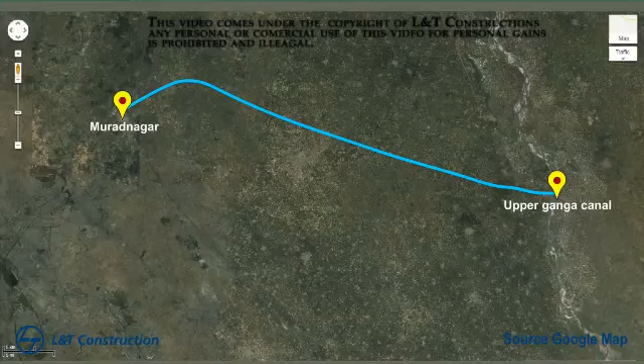Delhi Jal Board, a department of National Capital Territory of Delhi, is responsible for entire Delhi's water supply and sewerage system. Bhagirathi is one such water treatment plant, designed and commissioned in the year 1983. The primary source of raw water is from Upper Ganga Canal through the intake at Muradnagar. The raw water flows through 2800 mm diameter gravity main to the Bhagirathi water treatment plant from Muradnagar.

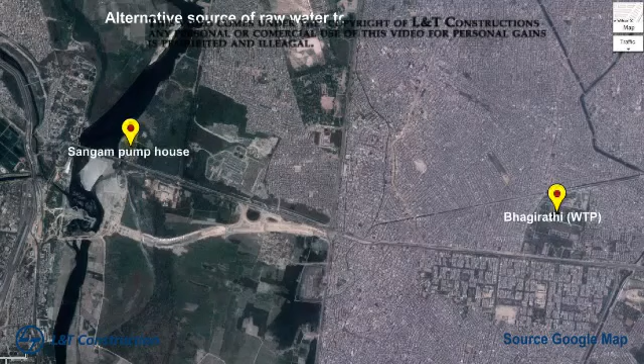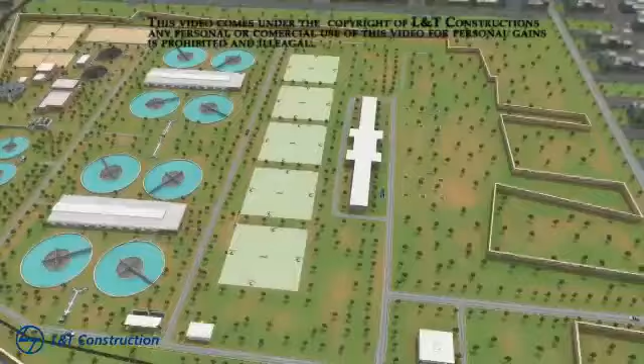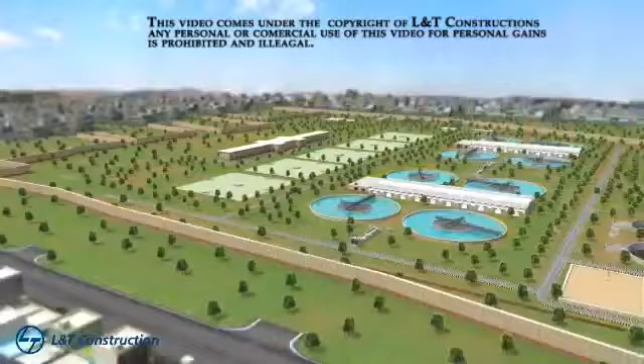Alternative source of raw water to the Bhagirathi water treatment plant is river Yamuna by pumping from raw water pump house at Sangam, Wazirabad. Bhagirathi water treatment plant works on the proven conventional treatment technologies to provide quality potable water 24/7 to entire East Delhi, covering more than 40 lakh population. The water treatment plant consists of one bifurcation chamber, 8+2 clariflocculators and 40+4 rapid sand filters and other utilities for disinfection, chemical addition and storage.

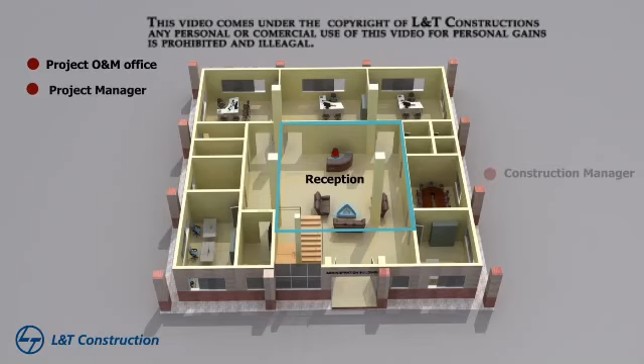Administration building. Rehabilitation would strengthen the building and give new look interior as well as exterior. At ground floor, there would be contractors project, operation and maintenance office, reception, place for project manager, construction manager, plant manager, planning cell, execution and administration staff with pantry arrangement. First floor would be for Delhi Jal Board officials and conference hall, suitable to accommodate 30 participants.

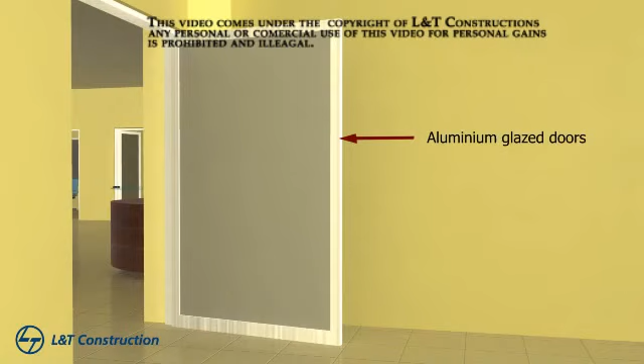The building would have vitrified tile flooring, aluminium glazed doors and windows, interior wall finished by oil-bound distemper and exterior finish by Dholpur and Agra stone cladding. Also, roof waterproofing by APP membrane done over screed concreting. The building would promote green building concept. Process. Intake work at Muradnagar.

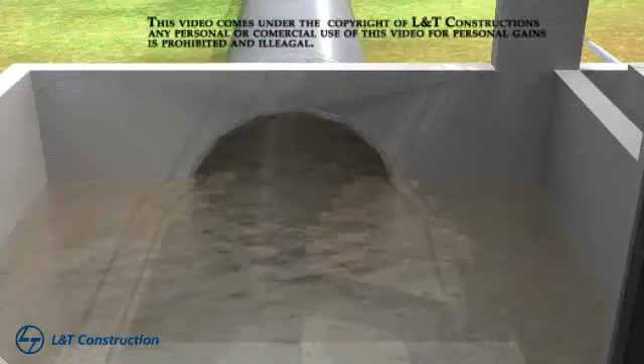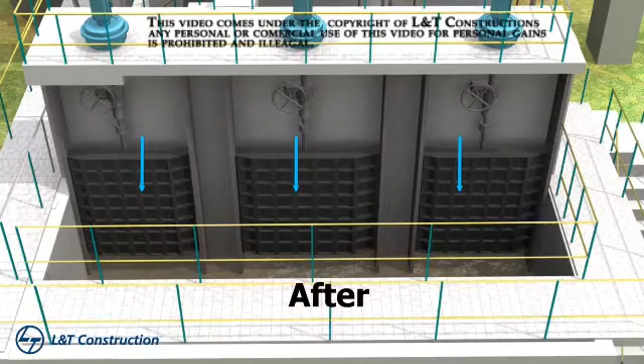Bifurcation chamber. Raw water comes from Upper Ganga Canal, flows through 2800 mm diameter gravity main to the newly constructed bifurcation chamber, which includes one electrically operated sluice gate of size 3000 by 3000, which shall have control over full flow, 6 electrically operated sluice gates before and after bar screens, 3 numbers PLC-based operated SS bar screens which remove floating materials, 4 motorized operated delivery valves to supply water to 8 clarifiers of 100 mgd and 1 motorized operated delivery valve to supply water to 10 mgd water treatment plant.

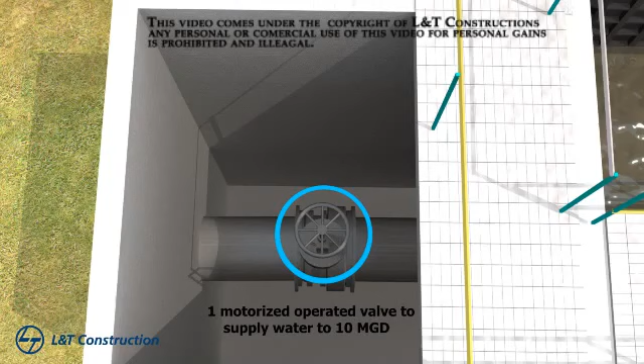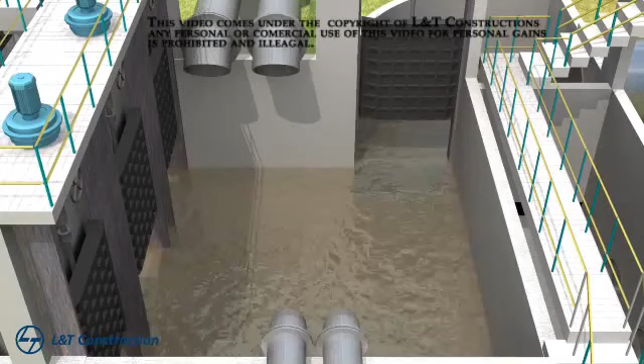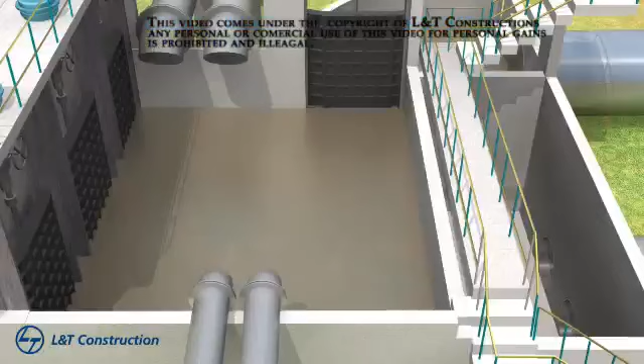An overflow arrangement is also provided to handle excess flow or to bypass entire flow during power outage or other emergencies. When Upper Ganga Canal is closed for maintenance, raw water from Sangam raw water pump house is supplied through 2 1500 mm pumping mains to the bifurcation chamber. 24 hours automatic monitoring of water quality and quantity of incoming raw water. If the set desired parameters of raw water vary and fall below the acceptable limits, there will be a warning alarm. If the same situation continues, the PLC system will automatically deliver command of stopping of raw water.

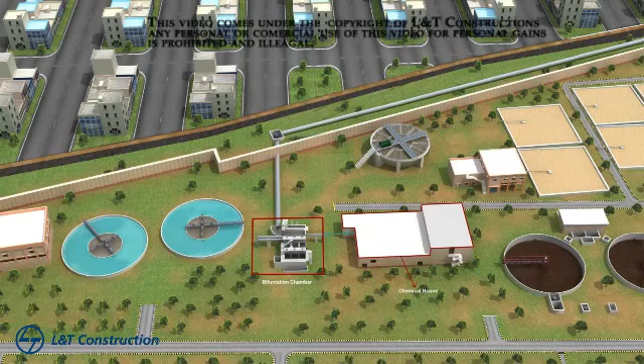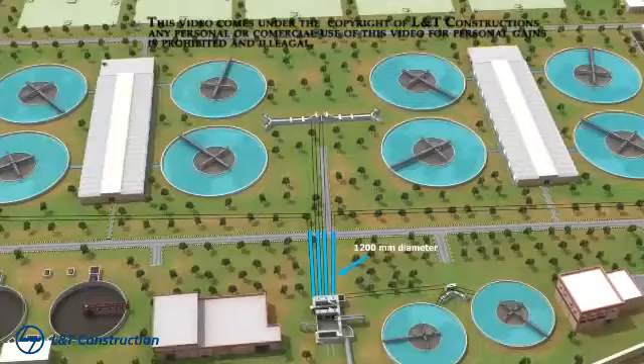Pre-chlorination system installed in new chemical house is responsible to dose chlorine in bifurcation chamber water as a disinfectant and prevent algae growth on water contact surfaces. Clarifier. From bifurcation chamber, water flows through 4 1200 mm diameter pipes towards respective inlet chambers. One additional 800 mm diameter pipe is also provided to supply raw water to 10 mgd water treatment plant. From each inlet chamber, water flows via 2 different motorized operated penstock gates through 2 divisional channels to flash mixers. The division channels have measuring flume to measure flow. Coagulants, alum and PAC, which come from chemical house by pumping line, dose into the respective channel.

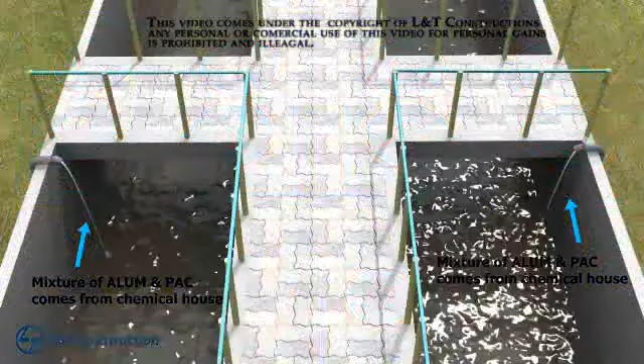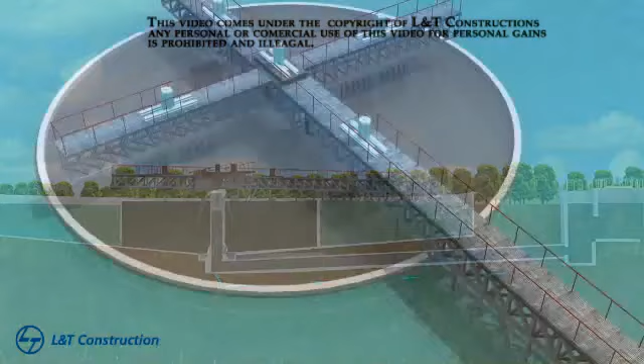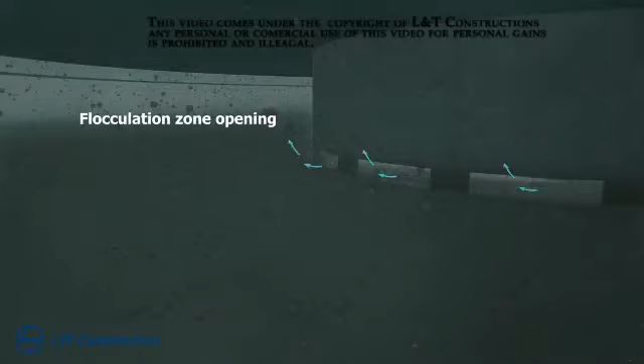Flash mixers consist of VFD-based electrically operated agitator to mix coagulants, alum and PAC properly in raw water. From flash mixer, water goes to clariflocculator feed chamber. From each dedicated clariflocculator feed chamber, water flows through 1000 dia CI pipe to clariflocculator. Total 8 numbers clariflocculators are available in the main stream of 100 mgd. In each clariflocculator, water enters through openings provided in central shaft. Water fills into the flocculation zone first, where slow mixing is done and flock formation takes place. Flocculation zone has openings at the bottom to direct the water into the settling zone, where settlement of flocks takes place. The settled sludge is scraped out by mechanical scraper from settling zone.

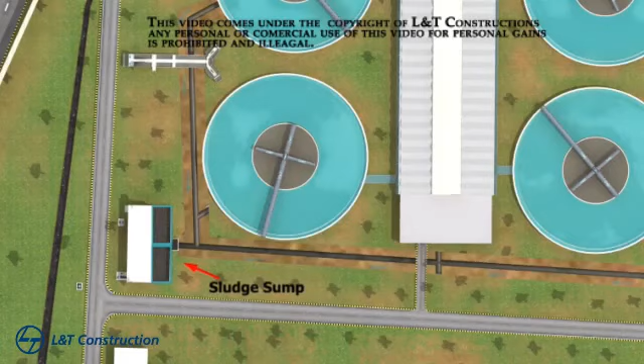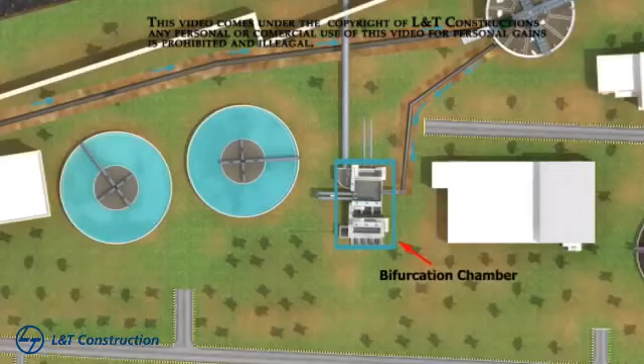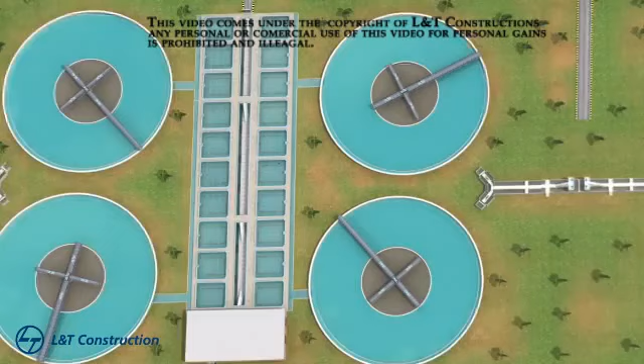The sludge from clariflocculator is collected into the sludge sump through sludge pipeline. The same sludge is pumped to the reactor thickener of recycle plant. From reactor thickener, the supernatant is recycled to bifurcation chamber, which minimizes water losses. The clear water from clariflocculators is collected into the peripheral launders. The collected clear water enters into the filter house via filter feed water channels. At the outlet of clarifier and prior to peripheral launders, water passes through independent gate, useful during isolation of clarifier for maintenance.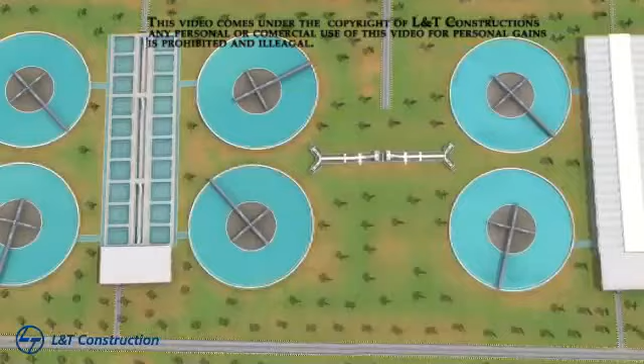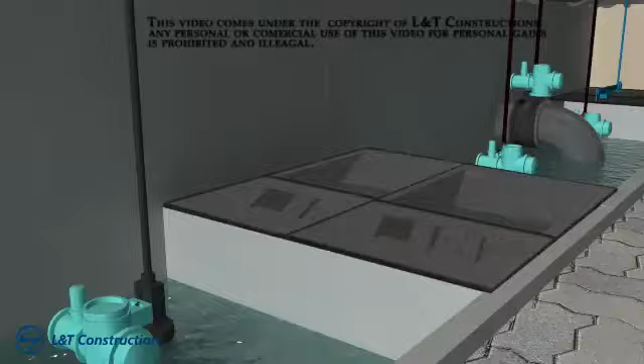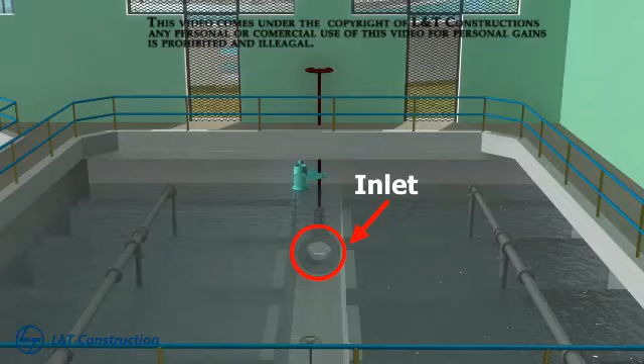Filter house. There are 2 filter houses in the main stream. Each would be with micro PLC based 20 rapid sand filters in 2 rows. Water passes through these filter beds for further treatment to achieve desired quality of water. Below the filter media, a grid of laterals collect pure water and transmit it to manifold channels, then further to filter control boxes, where flow control valves regulate the flow to maintain constant rate. From filter control box chambers, the filtered water flows to the underground reservoir through clear water channels. Chlorine is dosed at the clear water channels, east and west, to achieve complete disinfection before storing the water into the underground reservoirs.

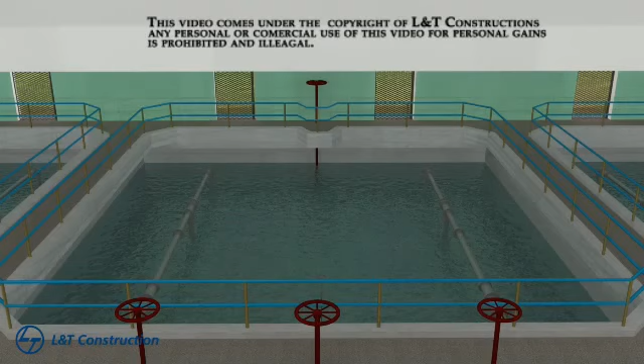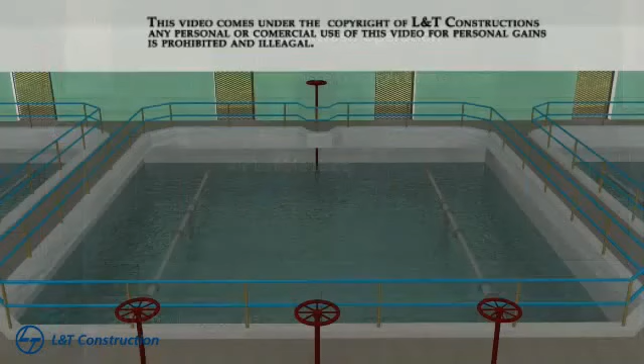Under drain system with new motorized operated inlet, outlet, backwash inlet, backwash outlet valves. The feature of micro PLC based filter bed is continuous automatic monitoring the healthiness of filter bed and also ensuring the execution of backwash operation without any manual interference. Loss of head and rate of flow. The backwash of filter bed is programmed in such a way that if loss of head is more than the set parameter, the system goes for backwash process. Also, in case of high turbidity in outlet of filter bed, the micro PLC system would automatically shut down the concerned filter bed and also send the information and alarm to main control room for necessary action.

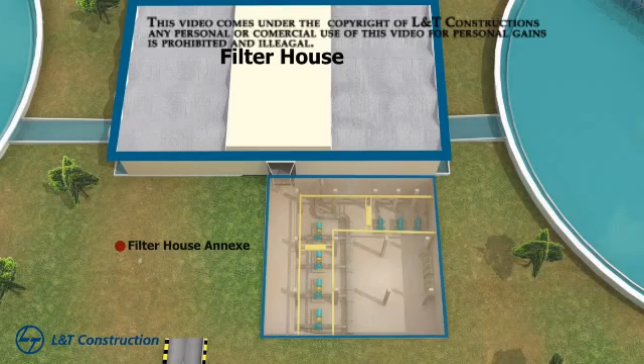Filter house annex. Each filter house is equipped with a PLC-based filter house annex for backwash water and air supply. The PLC of the filter house annex would monitor the performance of the micro PLC provided by each bed and also supply the water and air on requirement and request of the micro PLC for backwashing purposes automatically. There would be provision of automatic dewatering pumps for dewatering the excess water.

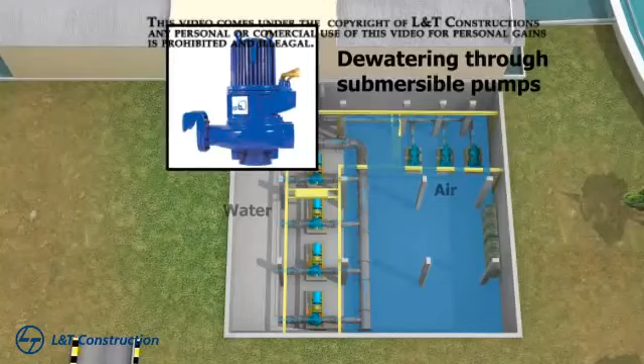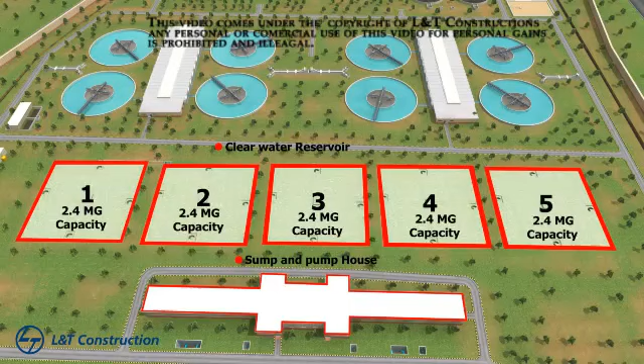Clear water reservoir. The disinfected clear water comes from the filter houses, 2 of 100 mgd and 1 of 10 mgd, and is stored in 5 numbers clear water reservoirs through the clear water channel. Each clear water reservoir would have motor-operated inlet and outlet gates for individual isolation of the clear water reservoir.

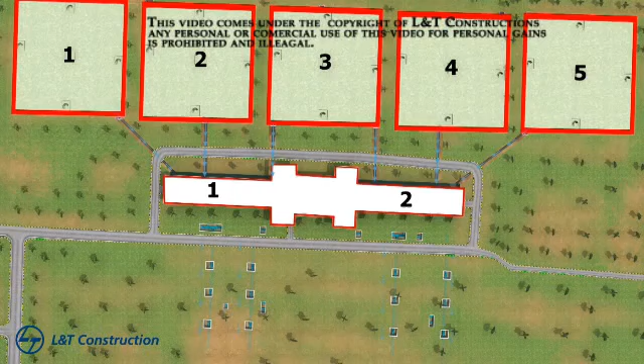Clear water sump and pump house. Clear water from 5 numbers reservoirs is distributed to 2 numbers clear water sumps. CWR number 1, 2, 3 are connected to CWS number 01 and CWR number 3, 4, 5 are connected to CWS number 02 for pumping to 4 numbers rising mains.

In any condition, if the water level is minimum, the system would give an alarm. If no precaution is taken, it would automatically stop the pump as per the program, hence preventing dry run. And in case of rise above maximum water level, the system would also give an alarm.

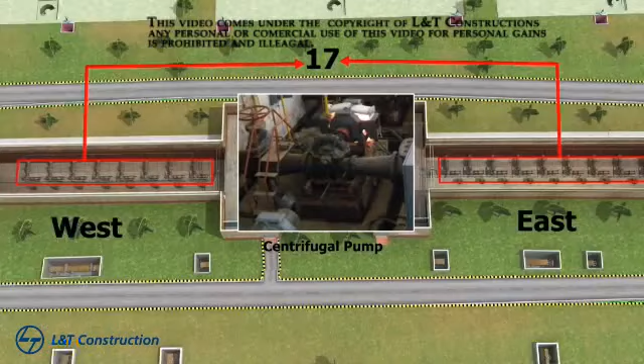There are 17 existing centrifugal pumps in the clear water pump house, where serial number 1 to 7 are of 12.5 mgd capacity for 45 meter head and serial number 8 and 9 are 7.5 mgd capacity with 45 meter head. Pumps from serial number 1 to 9 are on the east side of the pump house and serial number 10 to 17 are 12.5 mgd capacity for 45 meter head on the west side of the pump house.

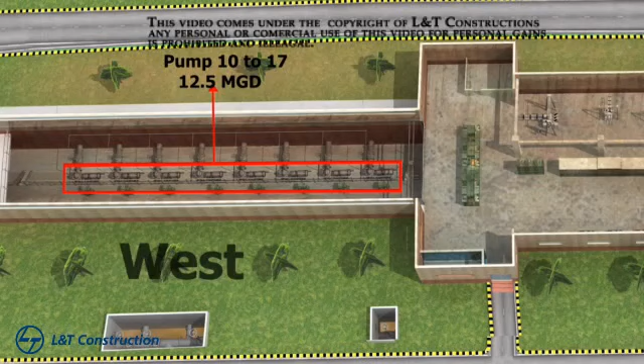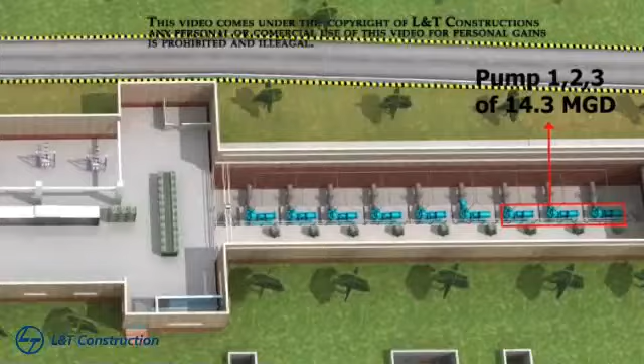The new installations of pumps are as per the same division of existing arrangements, where pump number 1 to 9 are on the east side and pump number 10 to 17 are on the west side of the pump house. New pumps number 1, 2, 3 are pumps of capacity 14.3 mgd, 20 meter head, driven by 3 numbers 200 kilowatt LT motors. Out of 3, pump number 3 is variable frequency drive to maintain the discharge as per variable requirement under a specific range.

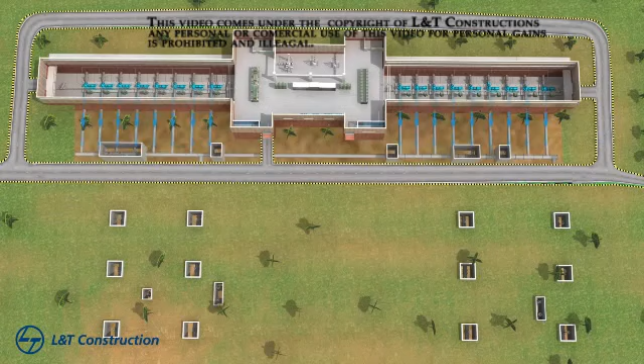Pump number 4 to 17 are of capacity 13.9 mgd, 36 meter head, driven by 350 kW HT motors. All 17 pumps would be commonly connected to a common header. In the existing system, there are 5 mains, out of which only 4 are in operation: Greater Kailash, Tahirpur, Shahadra and Jalvihar. The Civil Line main is non-operational now, and in the new setup also, the same 4 will be operational.

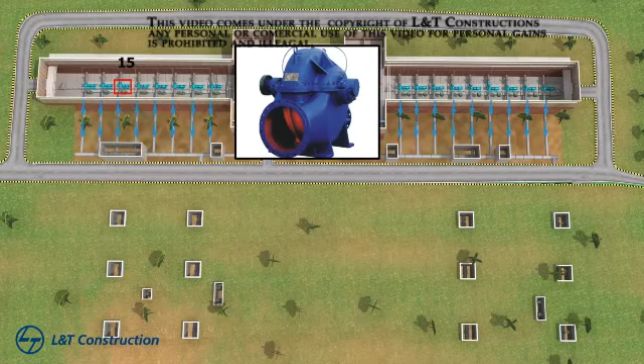The elimination of the Civil Line main from the system will help to have an additional 3 pumps of serial number 15, 16, 17 in new operation and add up in standby capacity. The new work includes rehabilitation civil work for the entire building and foundations. There would be provision of automatic dewatering pumps for dewatering the excess water.

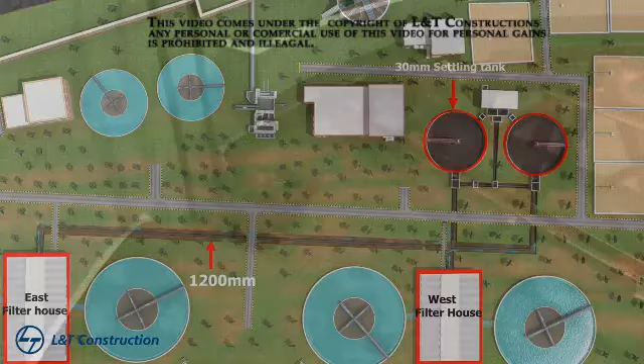Settling tanks and dirty backwash recycle. Dirty backwash from both filter houses flows through a 1200 mm diameter pipe by gravity to the inlet chambers of 2 30-meter dia settling tanks. Here, the settled sludge shall be scraped out by scraper and overflow shall be separated and directed to the backwash recycling pump house. The recycling pump house goes to the bifurcation chamber.

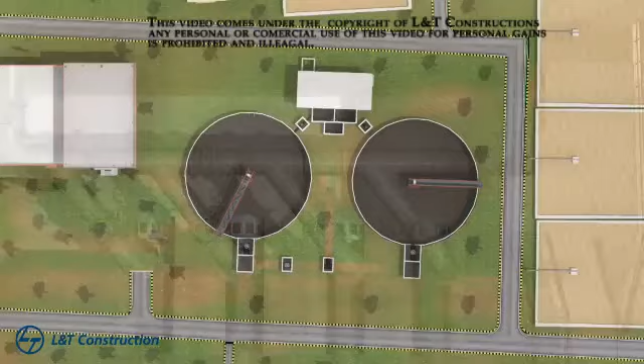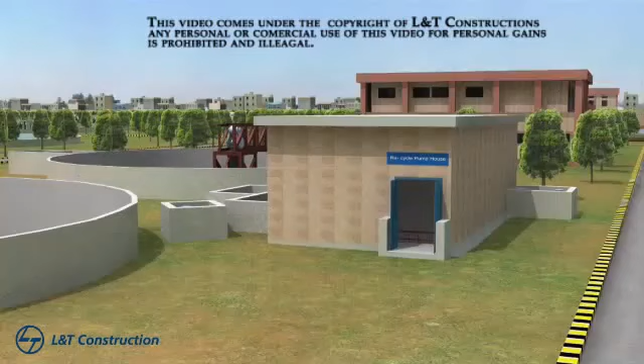The settled sludge shall be directed to the reactor thickener after installing a scraper in the settling tank. The new system would be well equipped at the inlet of the settling tank. There would be provision of automatic dewatering pumps for dewatering the excess water collected through seepage of gland packing and priming pumps for priming the pumps in case of negative suction head. The new work includes rehabilitation civil work for the entire building and foundations.

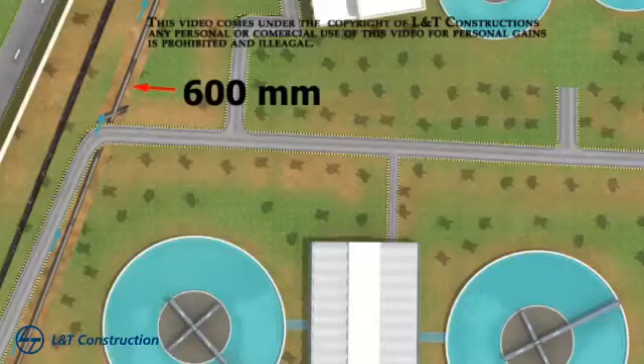Sludge pump house. The sludge collected from the sludge line under the clariflocculator is collected in the sludge sump and pumped through 4 running and 3 standby centrifugal pumps to the reactor thickener through a 600 mm dia main.

Chemical house. A new LM godown and chemical house would be constructed. The new LM godown would store 1000 MT of LM and the chemical house would be equipped with all machineries: the LM dosing tank, LM saturated tank and PSC dosing tanks. 6 mgd sludge recycling plant.

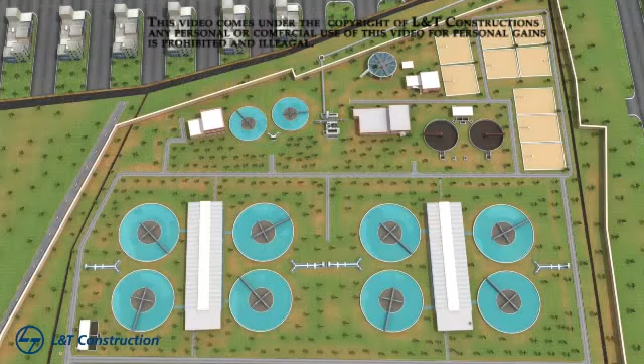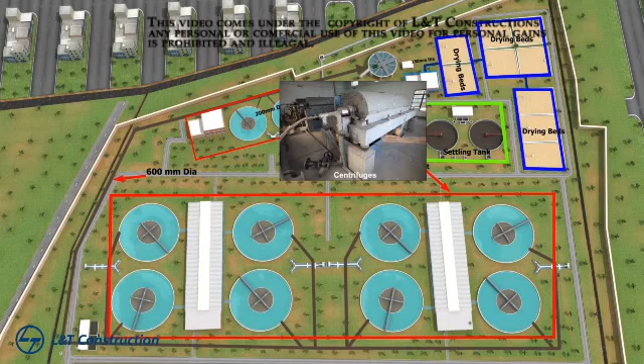Sludge is collected from the 100 mgd plant through a 600 mm dia pipe, the 10 mgd plant through a 200 dia pipe, and the dirty backwash settling tank, newly proposed. Filtrate from sludge drying beds through a 150 mm dia pipe and centrate from centrifuges through a 150 mm dia line go to the inlet chambers of the reactor thickener.

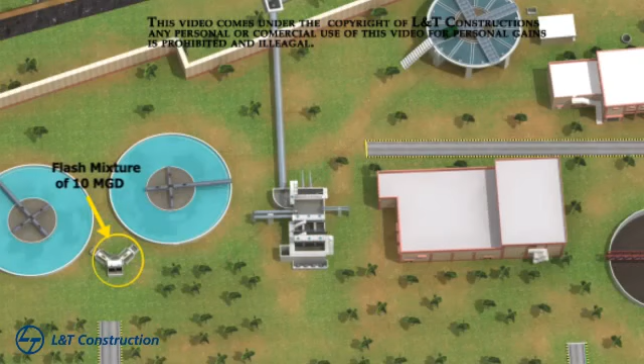Here, after the thickening process, the supernatant goes to the existing flash mixer of the 10 mgd plant and would go to the new bifurcation chamber after rehabilitation. Thickened sludge is directed to sludge drying beds or centrifuges or both according to the quantity of sludge generation. There is also provision to bypass the sludge in case of overloading through a drain outside of the plant. The sludge from the reactor thickener through the on-line sump is pumped by 4 centrifugal pumps.

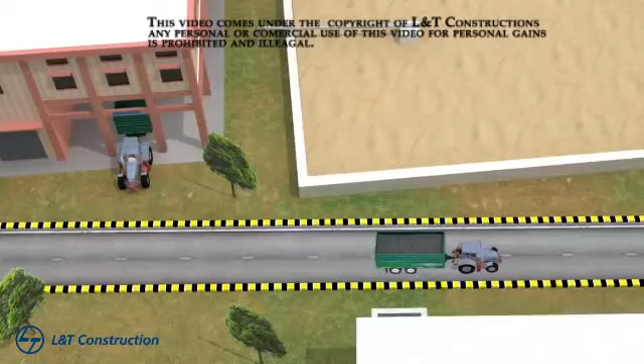There is provision of taking it to either drying beds, total 9 numbers, or centrifuges, 3 numbers, at the centrifuge building. Filtrate from sludge drying beds is collected in the filtrate sump and pumped to the reactor thickener by 3 numbers submersible pumps. The concentrated sludge from the sludge drying beds is removed manually and disposed of as advised by Delhi Jal Board officials. The sludge from centrifuges is dropped down in a tractor trolley and disposed of as advised by Delhi Jal Board officials.

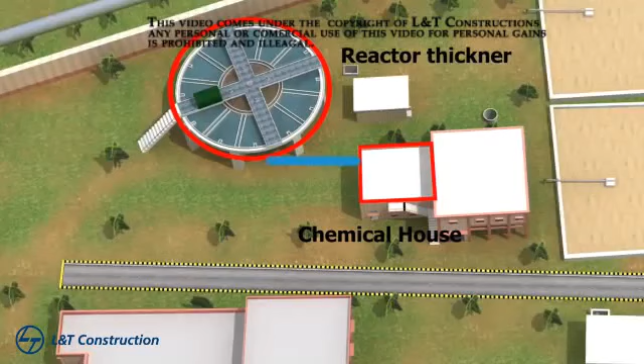The coagulant called polyelectrolyte is pumped by reciprocating pump from the chemical house to the thickener to accelerate sedimentation in its flocculating zone. Lime is also added to reduce acidic properties of sludge water through the chemical house.